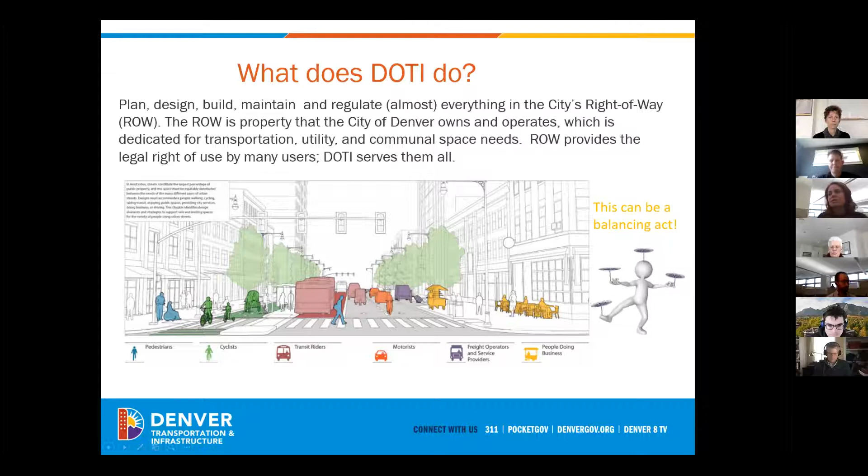So doing this work really is sort of a balancing act. Sometimes these uses are in direct conflict; a lot of the time they're not, but we have to think about the needs of the various uses of the street.

The other thing that's good to keep in mind - if you want some bedtime reading - Denver is required to follow the Manual on Uniform Traffic Control Devices, or MUTCD. This document is issued by the federal government, the Federal Highway Administration, and it sets out a whole set of standards, specifications, and guidelines for how our roadways should look. It's a great document for making sure our roadways are safe across the United States. There are a lot of studies backing up these guidelines, ensuring we're consistent as you go from place to place.

The thing to really know about these is that they can be supplemented by local laws and regulations, but we can't contradict them or we get ourselves in a lot of trouble. So the MUTCD forms sort of the basis of a lot of things we do. Sometimes it's not as progressive as we'd want for some of our uses on our streets, but we do need to abide by it.

So I just talked about a rule, so I'm going to talk about a tool to keep us on theme today. A tool for you guys is 311, and I bet everyone on this call is familiar with 311 and PocketGov, which is the online equivalent versus the number you can call. We really do encourage people to use 311 to report all sorts of issues out in the right of way, and that includes transportation concerns, complaints, or safety issues that you encounter.

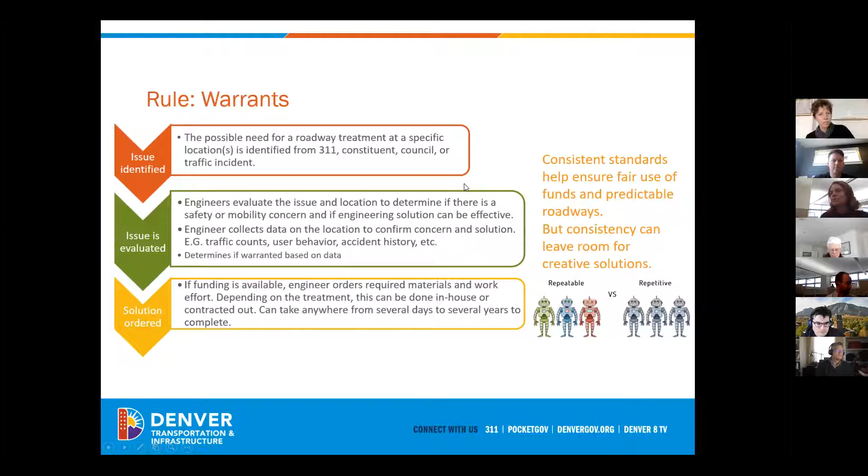From there, in a lot of cases, Thomas is able to write a ticket or work order, and it'll get installed relatively quickly. But depending on the type of treatment that's called for, sometimes we'll have to refer this to another program to actually do something, and that can take longer if it needs to be contracted out rather than done by our in-house crews. So that's just an understanding of what happens when you actually submit a 311 or submit an email to us—it eventually goes through that same process.

So I wanted to dig a little bit more into warrants and how we think about these things. One of the categories of what goes out on the street that we're all probably very familiar with are traffic control devices—our signals, our signs, our markers. When we're thinking about these traffic control devices, we're using them to indicate which user has the right of way.

That seems obvious, right? But the important fact here is none of these devices are used for traffic calming. When I say traffic calming, I'm really referring to dealing with speed. So we're never going to warrant a traffic signal to deal with a speeding issue. The same goes for a stop sign. Something to keep in mind.

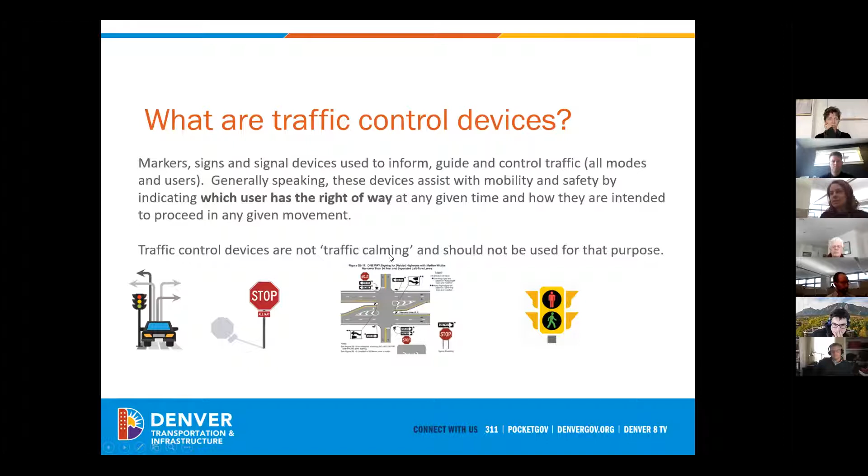I wanted to dig a bit more into what it takes to do a couple of these. So traffic signals - I know there's been desire for new traffic signals in certain areas of Central Park. When we're looking at installing a new traffic signal, I'll highlight one or two things. One, it's a traffic control device, so we use it to regulate who gets to go when. And the budget on these things is pretty high.

Traffic signals are actually one of our most expensive pieces of equipment to install. We usually have to update a whole intersection if we're putting in a new signal. I've seen signals that cost upwards of $1 million to get in the ground, and they really take at least 2 years from the time we start design to getting them in the ground. So that's just to set expectations for what it takes to put in a new signal.

And the warrant is large volumes of traffic in each direction - larger roadways that take signals. Sometimes we'll put in a traffic signal specifically to address a crash movement, where people are impatient and not abiding by right of way. That's when we might put one in for a crash reason. In general, unless we're downtown or in a very urban environment, they're not going to be closer than a quarter mile apart. This isn't the full warrant, but should give a flavor of what that looks like.

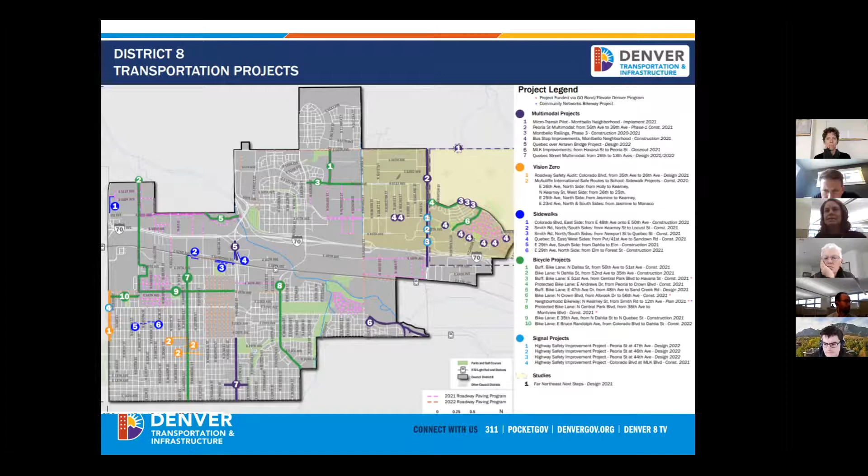Let me go through some of our upcoming projects. This is all of Council District 8 here, and we do have quite a few projects in this general area. Central Park has a fewer number of projects, partly because these are newer roadways that are much more likely to meet our standards and not need as much maintenance or change. But I did want to highlight a couple things coming up that I'm very excited about.

The first one, which Brad already mentioned, is the Central Park Boulevard Protected Bike Lane. This is a major project funded through the last bond issuance, so the voters asked for this. It's been several years coming, but it will be going in this November. Flyers are going out probably this week. This will be installed after a significant design process with community engagement involved.

What will happen is there will be an improved protected bike lane on Central Park Boulevard between Montview and 36th. In this case, protected means there's a parking lane that will be moved out from the curb to separate bikes from vehicles. There will also be vertical protection in the form of what we call flex posts and parking curbs. In addition, there are intersection-level treatments I'm highlighting here.

I know it's fairly small, but these treatments really help the bike lane through the intersection, and should also have some ancillary benefits of providing more space or a narrower crossing distance for pedestrians. So for a number of concerns on Central Park, I think this should provide some benefit in addition to any other treatments we're doing there.

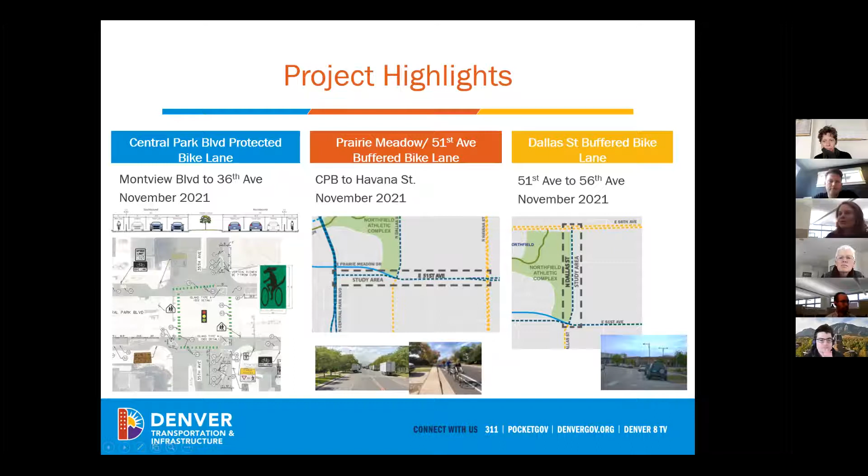Similarly, Dallas Street will also be getting a new buffered bicycle lane. So some new bike treatments and connectivity in the Central Park area, all coming in at the end of our install season before the winter sets in.

All right, so we're now going to dive into the specific set of concerns that the CPUN committee sent to me. If there are other locations with specific concerns, we can try to answer questions or at least take notes on those at the end. I'm going to run through these fairly quickly, but I'm very happy to talk through how we got to these results.

There were quite a few uncontrolled pedestrian crossing requests, meaning there isn't an existing stop sign or signal at that location. Thomas has been looking at these extensively, seeing what our new criteria would help us qualify for. Montview and Willow did meet the criteria, so we will be installing a crossing treatment there, most likely a rapid flashing beacon, but we have not confirmed that at this time.

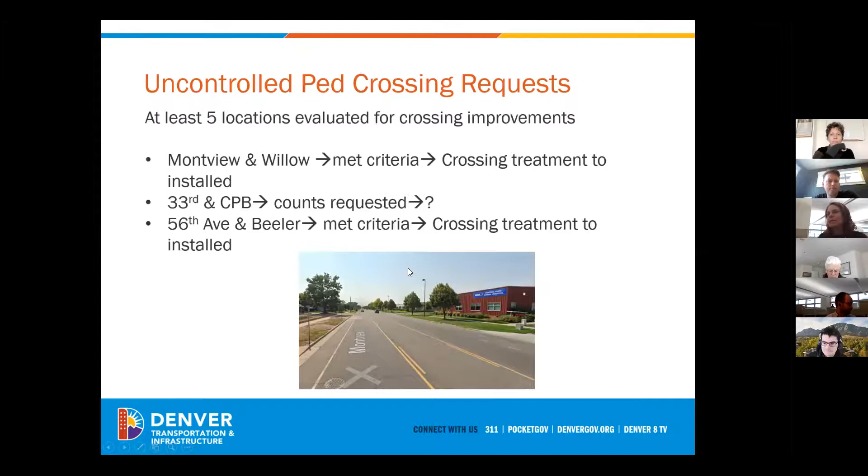33rd and Central Park Boulevard, we actually do need to collect additional counts at this location for travel. And 56th Avenue and Beeler, we did collect pedestrian counts, and it far and away meets our criteria, so a crossing treatment will be installed there as well. This one will most likely be that HAWK, a pedestrian-activated signal, but we don't quite know yet—that's a bigger investment, so more time will be needed to look into that one.

Moving on to Central Park Boulevard and 29th Avenue.

There's been a request to see if there is a way to allow more crossing time for pedestrians. The signal time is being evaluated, but there's some sort of technical difficulties here to make sure that we can do that. So we're still looking into that option.

I also wanted to point out that with Central Park Boulevard, at least moving east to west, the PBL, the actual feel of the crossing distance of this road will be lower as pedestrians can step out into that bike lane space in most cases and cross the street. That should help. And then there is some new bicycle detection, specifically for bicyclists on 29th, they should be detected more easily now. We put in some newer technology here to help facilitate that.

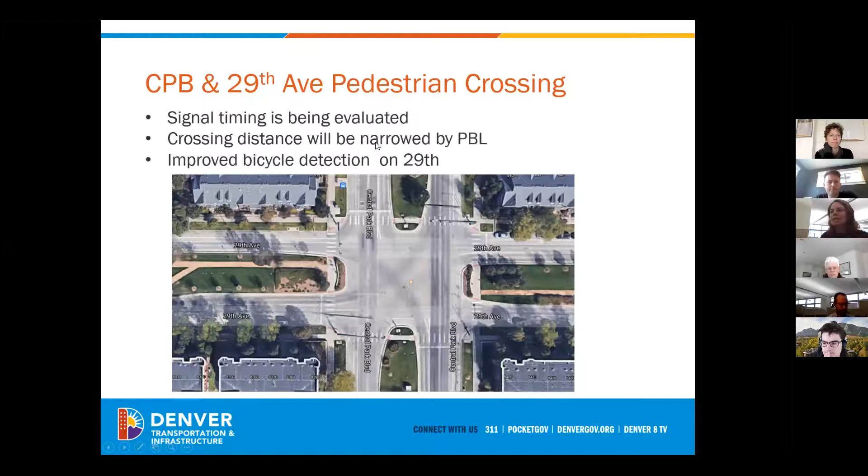So there's a little bit of a question mark on the signal timing, but there are some improvements coming your way here. Central Park Boulevard and 33rd Avenue, again, some interest in better pedestrian crossing. The signal timing is being evaluated. Again, oh, I think I put in the wrong information here.

See, I am blanking on what we had looked at here. I forgot to update this slide. Thomas, do you recall what was going on at this location?

I do. So we had received some requests for pedestrian crossing treatments, as well as looking into a traffic signal based on an investigation that was completed, I believe, late 2019 or early 2020. Neither of the two were met. However, with respect to the pedestrian crossing treatment, that evaluation was completed previously with our current pedestrian crossing guidelines.

And now that we're revisiting that with our new pedestrian guidelines, it's kind of being escalated. More of those intersections that are being captured with that new process are maybe ones that would have otherwise been a little more uncomfortable to cross, or so long that we wouldn't initially see that first checkpoint of 20 peds. So hopefully we won't need as many counts, but can kind of go off the land use, and we'll be working through that a little bit more once that gets adopted here soon. Thank you for reminding me there.

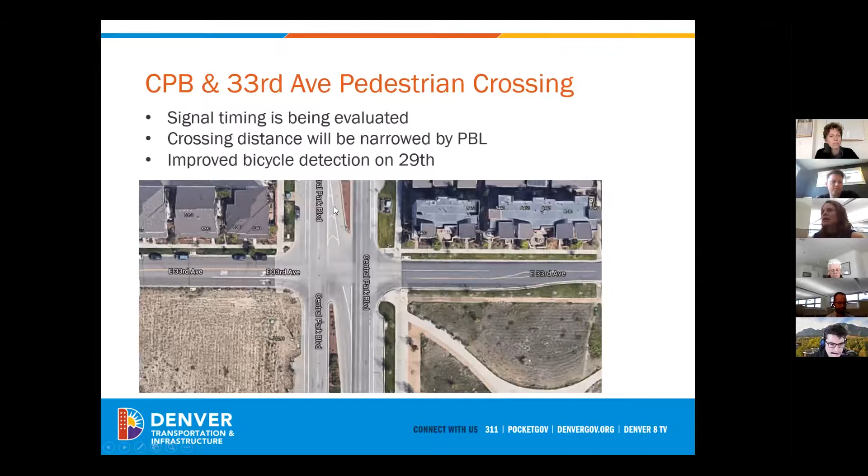Okay, so next up, we've also heard that there's concern about speeding along Central Park Boulevard. And that I don't think is specific to this area, but the sense is that it's specifically egregious between 56th Avenue and 61st as you move north.

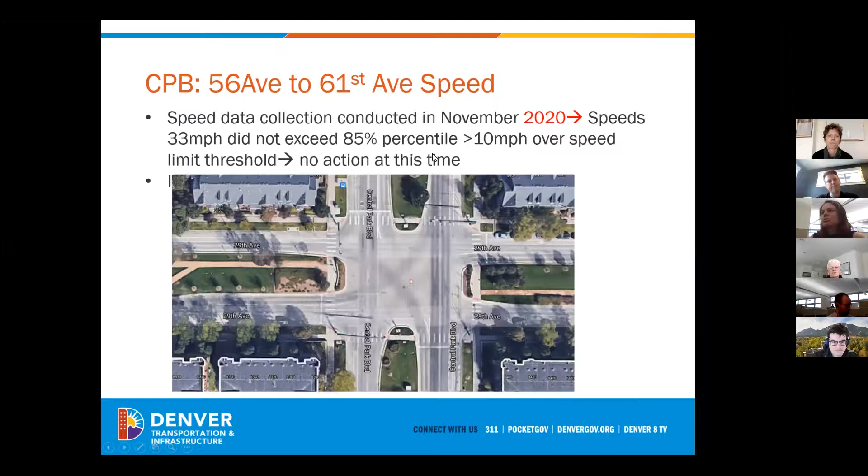So we did actually collect speed data at, I think, 58th in November of last year. What we found is that the speeds were between 33 and 34 miles an hour, depending on the direction. So it's just a tad above the speed limit in that area, but it doesn't exceed that sort of warrant thresholds we talked about, that 85th percentile speed. So at the moment, there isn't a specific treatment related to speeding there. We obviously want to continue to monitor Central Park Boulevard, and we'll be looking at the safety along this part of the corridor for sure.

Uinta and 35th Avenue, I know there's general concerns about as that new development comes in and making sure there's safety for everybody crossing in this space. I have shared this with the committee, and I think you guys are directly in touch with Brookfield as well, but a fully signalized intersection is coming here.

So the developer will be building the signal. Our understanding is that it will definitely be starting by the end of the year. They had initially hoped to have that complete before the end of the year. I'm not sure that's going to happen, but they don't always tell us their exact timeline until they come up for review. So that's our status on that one at the moment.

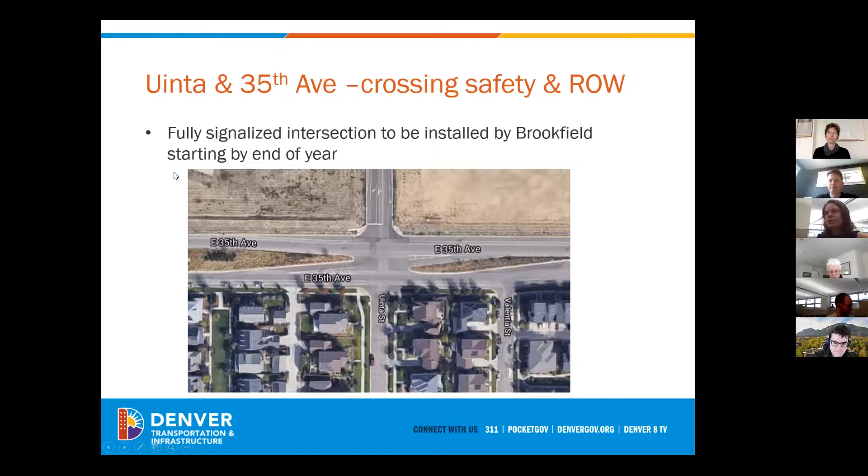On Emporia Street, I know there have been ongoing concerns about general traffic and also safety related to the amount, volume, and size of vehicles between 26 and MLK, probably serving those commercial uses to the south in Aurora. We did take counts initially in April of 2019, and they did show an unusually high number of freight.

And what we went through and did was install no truck signs, but also designed a truck routing, so there's a preferred direction for large vehicles to take. That does seem to have made a moderate difference. Counts were taken again due to concerns in 2020. The freight had dropped to below 3% of total traffic, which is our general threshold for specifically taking action on freight when we can. And the speeds are actually below the speed limit on that 85th percentile measure. So we'll continue to monitor this.

I understand that there is quite a bit of new development happening in Aurora. We will have conversations with their staff as that project moves forward, but in general, we don't have a warrant to do any additional treatments here. Once that development is in, or sort of on our 3-year rolling timeline of 2023, we can certainly reassess at this location.

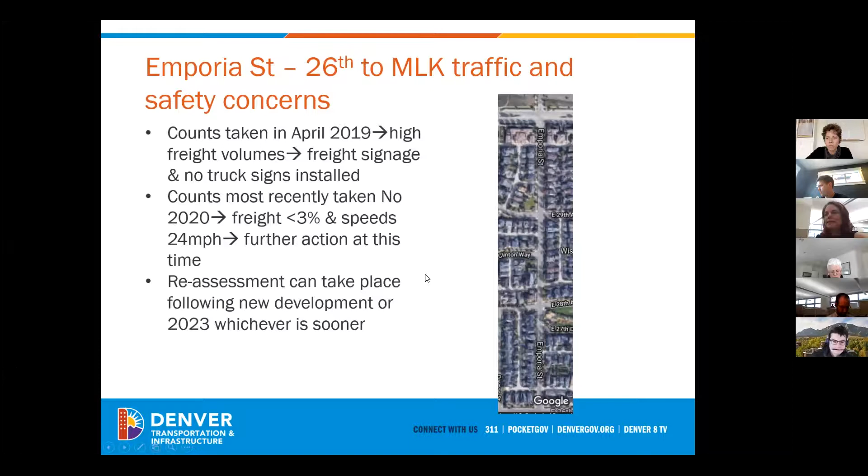All right, so Syracuse and 28th, sounds like there's general safety concerns here. I know there was a recent crash here that was fairly serious. In the past, this location has actually had a fairly serious crash trend.

So in 2019, daylighting was completed, which basically means that you make sure cars are not in the way, there's not foliage in the way, so that everyone has a good view as they cross through the intersection. And stop bars were added. I don't think those are showing up on this old aerial I have.

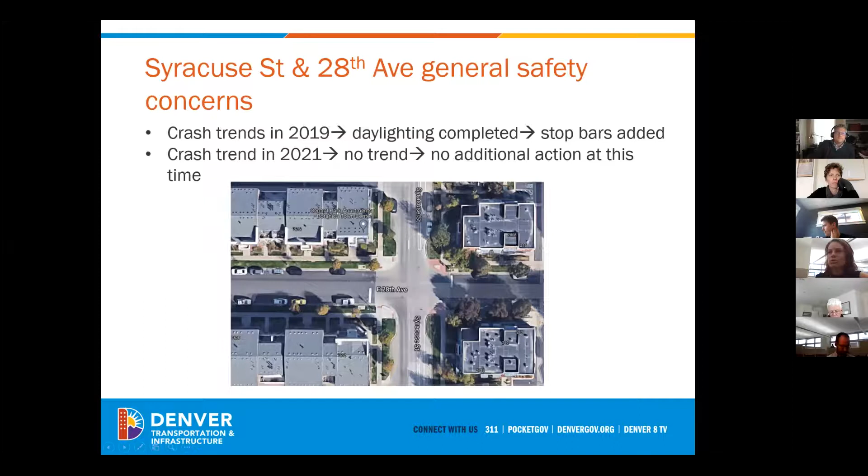I know again that there was a crash this year, but after reviewing all of the crash history this year compared to the past, we aren't seeing any particular trend that would require additional treatment at this time. So we'll keep an eye on this intersection, but there's no action at the moment.

Whew, we got through all of those. I'm sure there are quite a few questions. I see 20 in the chat, so we can open it up for that. I don't know if one of the committee board members wants to share those questions in a particular order, or we can just jump down the line. Yeah, I can read them in the chat, but I think Andrew has his hand up. If you want to go first while I'm looking through the chat.

That sounds good. So I live on Emporia Street between 26th and MLK, and it's not necessarily the generic volume of traffic, it's the exceptions rather than the rules. The challenge is this street, when it was built, clearly was not built to be a through street like Fulton or any of the other north-south streets, yet it's receiving the same volumes of traffic because it's a direct connection into a light industrial neighborhood in Aurora at the Stanley. So commercial traffic is certainly one of those things.

I am literally sitting and looking out my window and I watch it every day. We get commercial traffic screaming by. One of the problems we experience is that nobody sees the stop signs. Maybe a daylighting exercise would be good, but because this is such a small residential street, it doesn't have stop bars and it does not have marked crosswalks. So there's a completely uninterrupted strip that looks like basically a drag race strip, both for commercial trucks and irresponsible drivers.